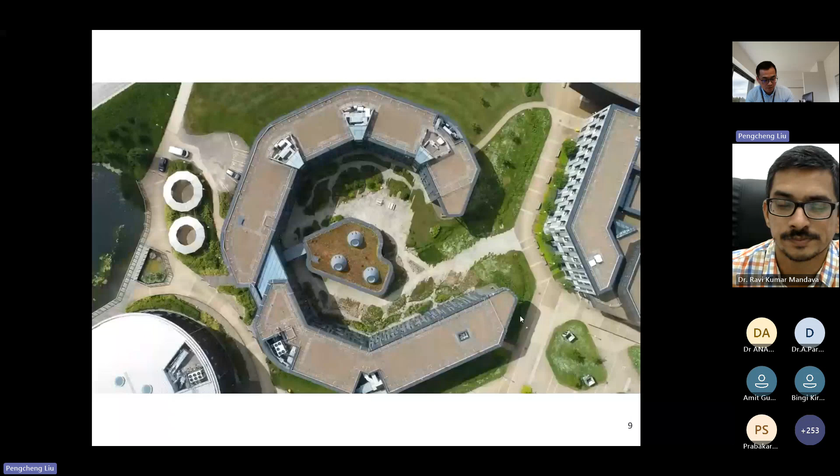Here's a video describing the department. The building itself is shaped like the capital letter C, representing the word 'computer.' Half of the building is used for staff offices, research labs, and meeting rooms, and the other half is used for software and hardware labs for teaching and research. As part of the larger computer science hub on campus, the Ian Wand building represents a commitment to fostering innovation, collaboration, and academic excellence.

York is home to 9 world-leading research groups within the department, each tackling critical challenges in various domains, including AI, automated software engineering, cybersecurity, human-computer interaction, vision, graphics, learning, and real-time and distributed systems.

Today, I'm a keen member of the Real-Time and Distributed Systems group, which leads the charge in advanced robotic and autonomous systems. Let's take a closer look at what we do. Our research group, established in 1990, focuses on systems where timeliness, coordination, and distributed computing are crucial.

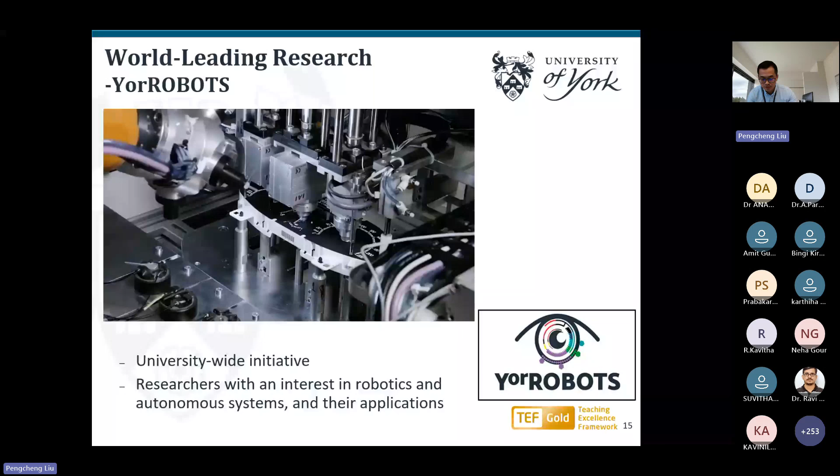The York Robotics Research Centre unites researchers from diverse disciplines with a shared interest in robotics and autonomous systems. This collaboration fosters innovation across areas like medical robotics, swarm intelligence, and ethical AI. By leveraging this interdisciplinary approach, we're addressing both the technical and societal aspects of robotics and autonomous systems issues.

At the University of York, robotics and AI research spans a remarkable breadth, engaging experts from at least 11 diverse disciplines across 11 departments. This cross-departmental collaboration enhances our ability to tackle complex challenges from multiple perspectives, for example from chemistry, computer science, electronics, mathematics, psychology, and more.

Our research focuses on designing systems that are advanced, meaning we employ state-of-the-art methodologies to push technological boundaries, and also ethical and trusted, meaning we're developing AI and robotic systems that are socially responsible and gain trust from users. These systems should also be safe and reliable.

We ensure the systems operate effectively, even in some unpredictable scenarios. So those are the principles which guide our efforts to create mobile and autonomous robots that are not only intelligent, but also dependable and ready for real-world deployment.

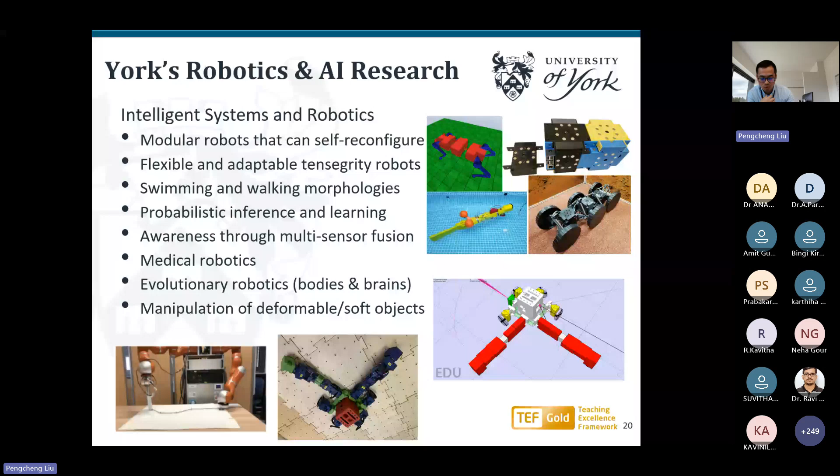Our research also addresses some of the most pressing challenges in robotics and AI today. For example, resilient systems in swarm robotics to ensure coordinated behavior among robotic swarms in unpredictable environments, and human adaptive learning to develop robots that can learn from human interactions and adapt in real time. I will come back to this area later in the later slides.

The other aspect is timing optimization in manufacturing, to improve efficiency in smart factories by ensuring tasks are completed on time and resources are utilized more efficiently. And the other is timeliness in wireless networks, where we're designing reliable and time-sensitive communication systems for autonomous applications. Each of those areas has far-reaching implications from manufacturing and healthcare to transportation and beyond.

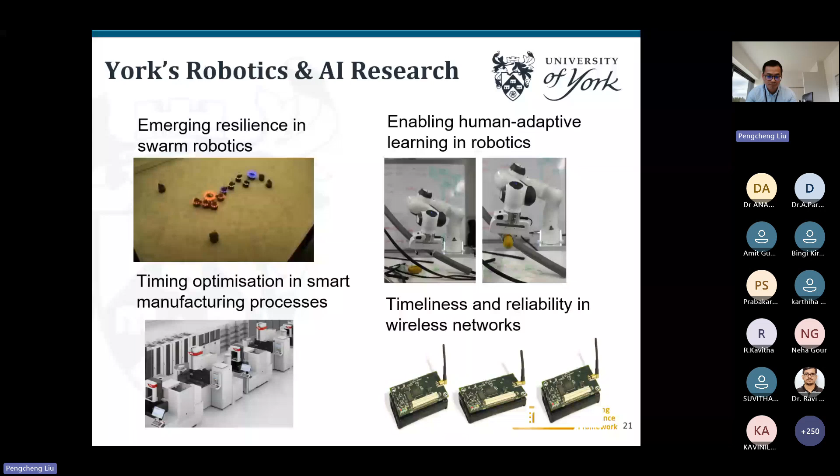We also play a pivotal role in the UKRI Trustworthy Autonomous Systems Program, which is a 33 million pound initiative aimed at creating autonomous systems that are both trustworthy in principle and trusted in practice.

At the University of York, the Institute for Safe Autonomy, or ISA, is a flagship initiative addressing the global challenges in ensuring safety for autonomous systems and robots. We have more than 35 million pounds invested. ISA is a hub of interdisciplinary collaboration, combining expertise across academia, industry, government, and civil society. Its mission is simple but critical: to design, develop, and rigorously test robots and autonomous systems to ensure their safety, and to set new standards for the development and deployment of robotics and AI.

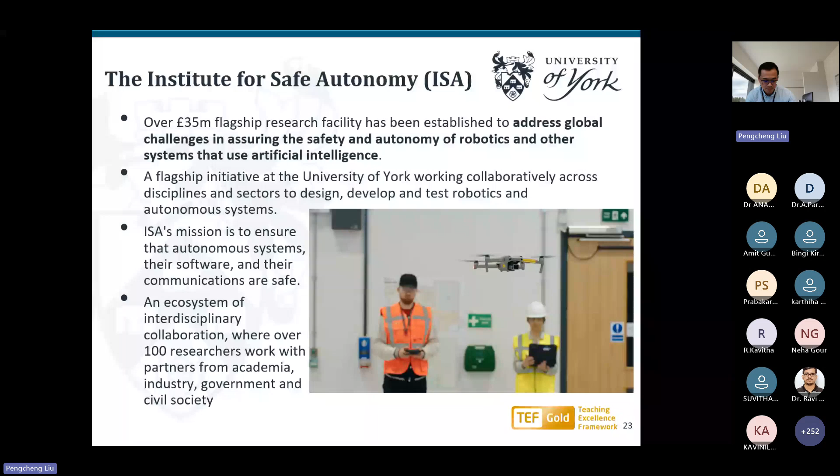I'm a key member of the ISA. Over 100 researchers work together there to shape the future of robotics and autonomy, from safe software to reliable communication systems.

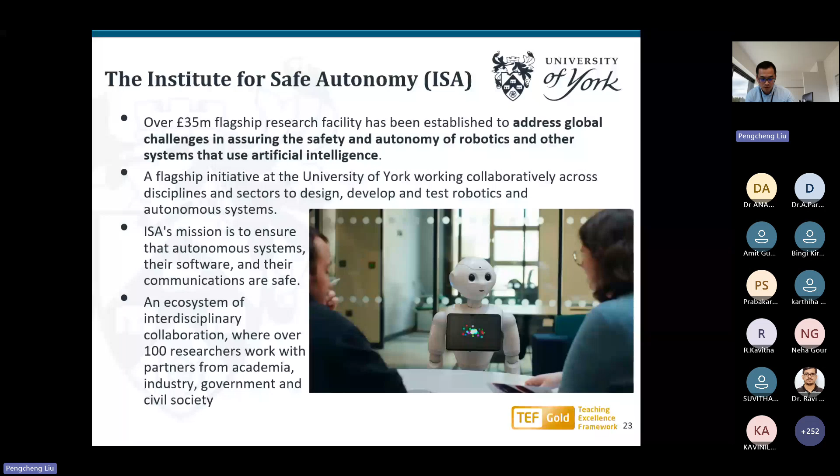The ISA's work is organized into 4 fundamental research pillars. The first is design verification: developing rigorous frameworks to test and validate the safety of both software and hardware for autonomous systems. The second is assurance, tackling the challenges of regulatory compliance and public trust to make autonomous systems more acceptable and desirable. The third is communications, innovating resilient communication mechanisms, including quantum communication technology, which is vital for secure and reliable operations. The last is society and ethics, applying practical ethics to ensure these technologies align with societal needs and values.

We have the most advanced facilities in the north of England, representing a state-of-the-art living lab for research, testing, deployment, and development of autonomous systems. For example, we have a 6-meter high indoor test space for evaluating ground vehicles, water drones, and aerial autonomous systems such as drones.

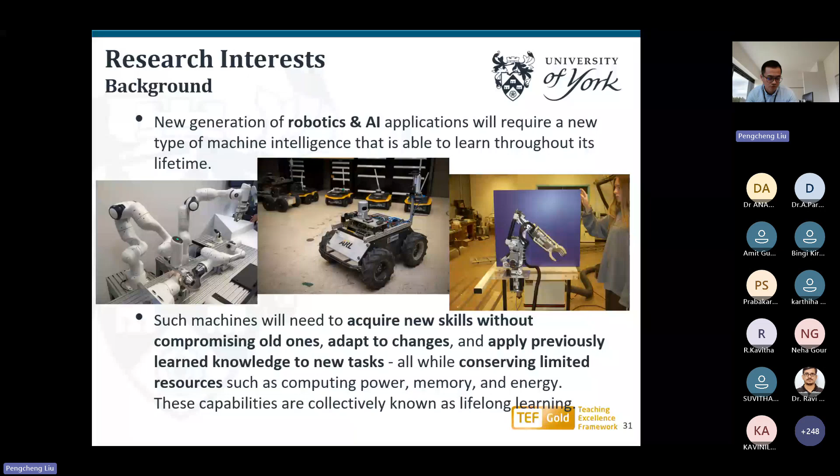Our vision lies in bridging the gap between biology and robotics to create intelligent systems with lifelong learning capabilities. By understanding the adaptability and autonomy found in biological systems, we aim to develop robots that are resilient, energy efficient, and flexible and adaptive in their interactions with humans and their surrounding environments.

This research vision has applications in areas such as human-robot collaboration, which I will talk about later, and soft robotics, agriculture and aquaculture, environment monitoring and environment control, and embodied artificial intelligence. These innovations are shaping the next generation of robotics AI systems.

To generally summarize our research vision, we aim to develop intelligent machines that behave like biological agents. These machines will never stop learning, continuously improve their performance with experience and interaction with the environment, and operate with minimal resource demand. Our goal is to create systems that adapt dynamically to new environments and challenges, enhancing their utility across industries. So lifelong learning is not just a concept, it's a foundation for the next wave of robotics innovation.

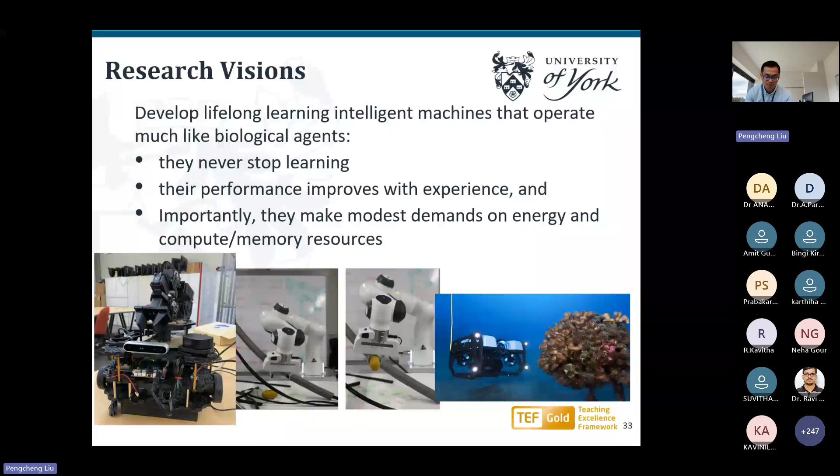I'm looking forward to establishing some new partnerships with your institutions, and hope to create more innovative solutions in robotic AI.

So those are the photos we took. We built up a foundation, and with this foundation we're driving advancement in autonomous systems, robots, and lifelong learning across the globe.

Now I've shifted my focus to the technical detail of motion and path planning, a key area of research in robotics. Let's take a moment to bridge the gap between theory and application in robots. We've dived deeper into the specifics of motion planning methodologies, and how those theories are being applied to solve real-world challenges.

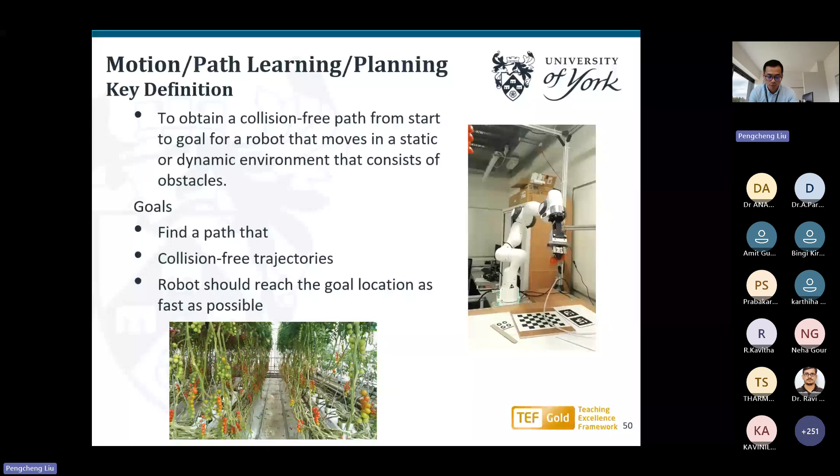So the problem of motion planning can be stated as a start pose of the robot, a desired goal pose, and we need to know the geometric description of the robot, which means the robot must know or have an indication of where it is in the map. And also we need to know the geometric description of the world, which means a global map is needed.

So to further understand motion planning, let's define a few key concepts. The first one is configuration space. This refers to the set of all possible robot configurations, where each configuration specifies the position and orientation of the robot in the environment. For example, in 2D space, a configuration might involve just x and y coordinates, while in 3D space we also consider orientation angles. Using the configuration space simplifies the planning process by mapping the robot's physical environment into a mathematical space.

In the C-space, we also represent the obstacles in the robot's configuration space. Each obstacle maps to a region where the robot's configuration would lead to a collision. For example, in 2D space, an obstacle might be just a physical rectangle, but in 3D configuration space, it becomes a larger area, accounting for the robot's size and shape.

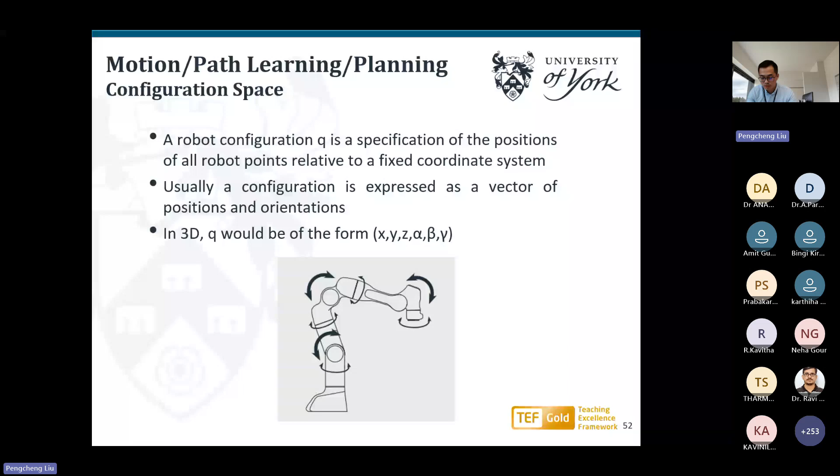The next definition is the obstacle region. The obstacle region in motion planning refers to the part of the robot's environment where movement is restricted due to the presence of obstacles. Those obstacles could be static, like walls, furniture, or equipment, or dynamic, for example moving vehicles, humans, or other robots.

For environments with moving obstacles, the obstacle region is time dependent. So the algorithm must predict and account for their motion, which adds more complexity. The obstacle region is critical in path and motion planning algorithms because the robot's trajectory must avoid this region while navigating from the start to the goal.

The prevailing algorithms, like sampling-based planners, which I will come back to later in the slides, for example RRT, or optimization-based methods, explicitly account for the obstacle region to ensure safety and efficiency. By accurately modeling the obstacle region, motion planners can generate collision-free trajectories and adapt to complexity in the cluttered environment.

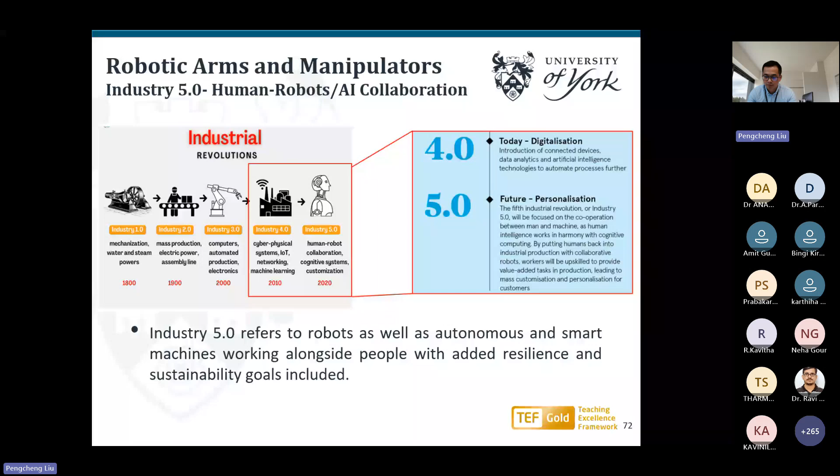So industrial robots in sectors like automotive manufacturing operate in a high throughput environment. Here's some pictures. The traditional robots, as I mentioned, operated in isolated cages, performing tasks like welding and assembly at high speed. However, those systems required extensive programming, leading to significant downtime during reconfiguration.

So the trend is with collaborative robotics, we are moving towards greater flexibility, allowing robots to operate closer to human operators, while simplifying reprogramming through learning by demonstration, for example. I will come back to that point later.

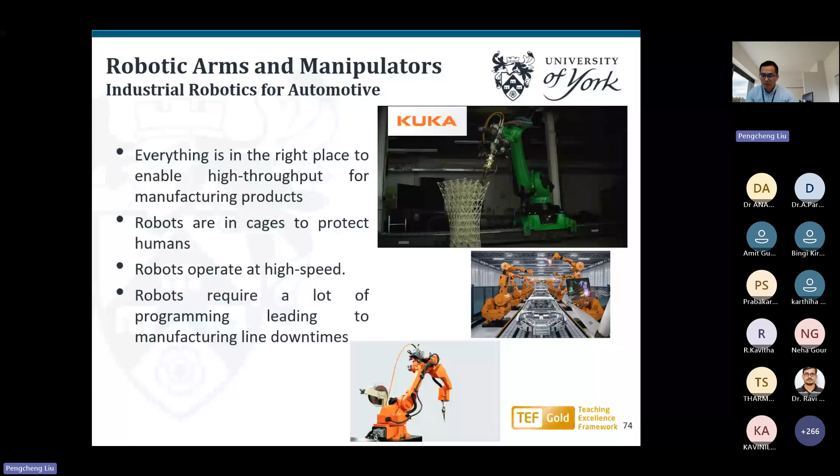So those are designing options, solutions for the robotic arm, which involves several key components. The first one is identifying the objects to manipulate and their positions, and then configuring the end effector and low-level controllers for precise handling, and then implementing trajectory planning and intelligent control architectures to achieve the desired motion. Sensors and virtual simulation environments are often integrated to ensure robust design before deployment in the real world.

As you all know, safety is paramount in robotic systems, especially when working alongside human operators. There are some standards, such as ISO TS 15066, 2016, which outlines safety requirements for collaborative robots, ensuring human-robot interaction remains safe. Here are some links and some readings.

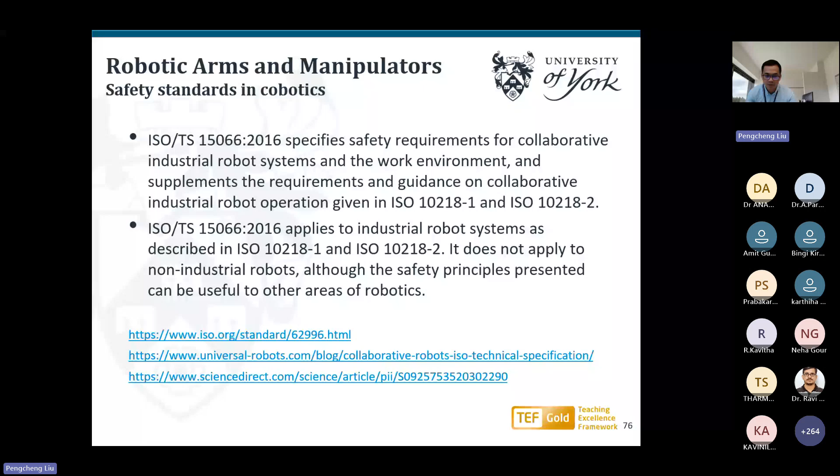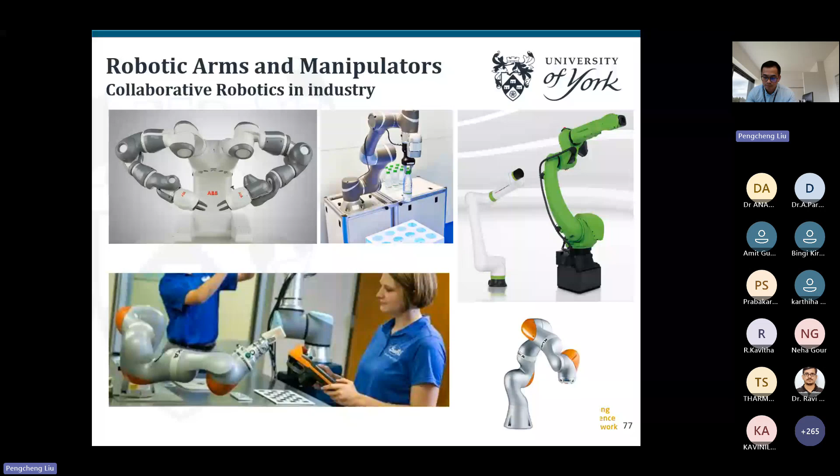So those are some prevailing and popular collaborative robotics in industry. The cobots are versatile and user-friendly, designed to work without physical barriers. They operate at a lower speed, can be repositioned easily, and are often programmed via kinesthetic teaching, enabling rapid deployment for new tasks. I will come back to that later - it's how we can collaborate with the robot and how we interact with the robot.

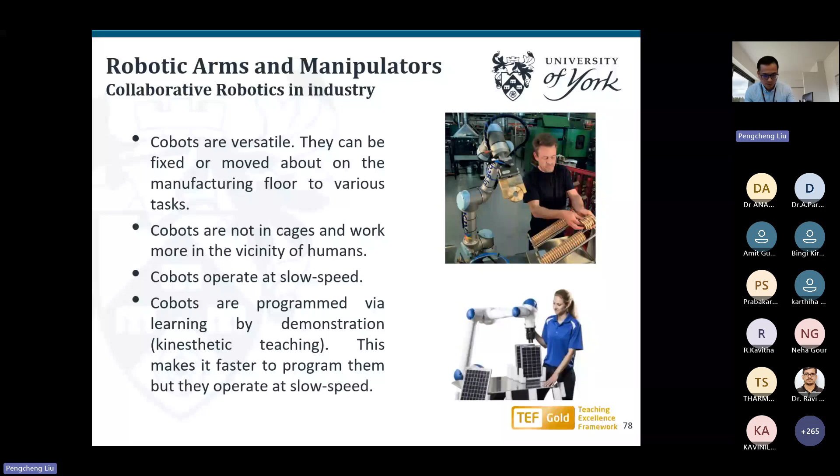So the robotic arms and manipulators are mechanical systems designed to replicate human arm movement and perform tasks like lifting, assembling, or welding. But they vary in design, functionality, and number of degrees of freedom, which defines their range of motion.

Here are some different types of robotic arms, like articulated arms, which is the most common design, resembling a human arm with multiple rotary joints, which has high flexibility, making them ideal for complex tasks like welding or assembly. And the other one is Selective Compliance Assembly Robot Arm, which is designed for tasks requiring high precision in a 2D plane, such as pick and place operations, and is compact and fast.

And some other arms like Cartesian robots, which operate on 3 linear axes, X, Y, Z, moving in straight lines, ideal for tasks like 3D printing and CNC machining as well. And other arms like cylindrical robots combine rotary and linear motions, working with cylindrical workspace, used in some simple tasks like handling machine tools.

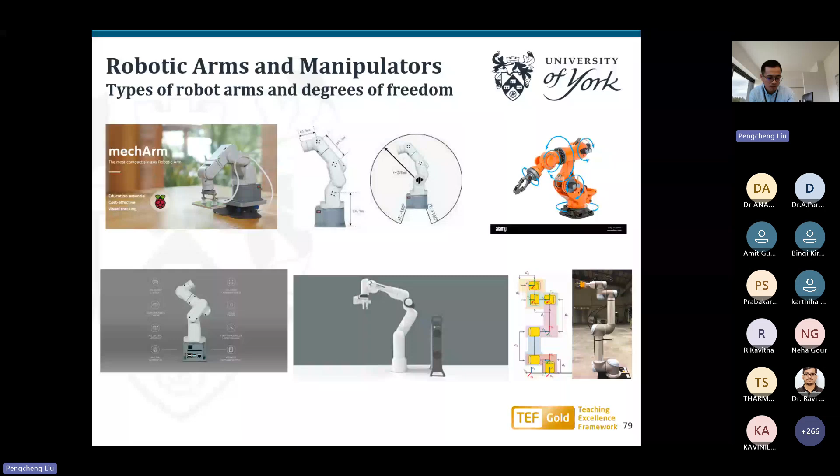So the robot I'm going to talk about later in the slide is a Franka Panda robot, which is 7 degrees of freedom, which has 1 degree of freedom redundancy.

And here's another very popular robotic arm, which is a universal robotic arm produced by a Denmark company, which are lightweight, flexible, and collaborative, designed for a wide range of industrial applications. And so it's a cobot, collaborative design.

And also it is very easy to program. It has an intuitive programming interface and flexibility, combining different models in varying payload like UR3, UR5, UR10, and can be used for tasks like assembly, packaging, welding, and more. And 6 degrees of freedom - it has 6 joints, offering high flexibility and a wide range of motion.

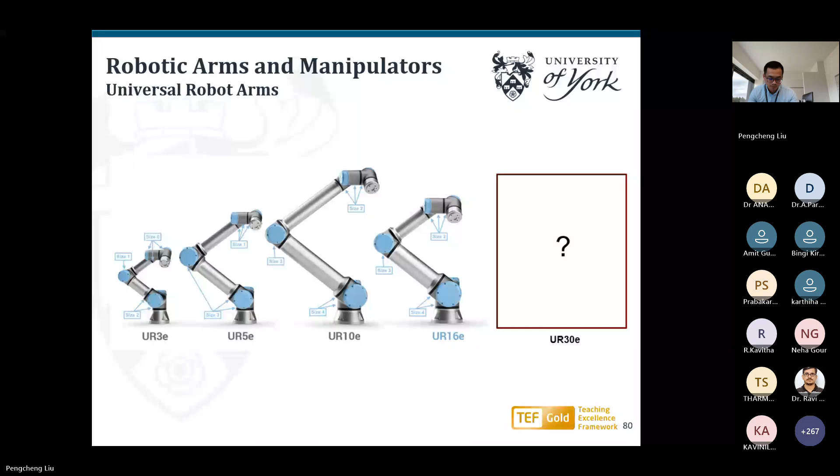So next, I'm going to talk about the end effector types. The end effectors are very critical for robotic arms as they determine how robots interact with their environment.

So the common types include parallel grippers, which are simple and widely used for pick and place tasks. And the other one is three-finger grippers, as you can see in the second figure, which provide dexterity for handling irregular objects. And also vacuum cups, which are ideal for smooth surfaces like glass or metal, and magnetic grippers, which are effective for handling ferrous materials.

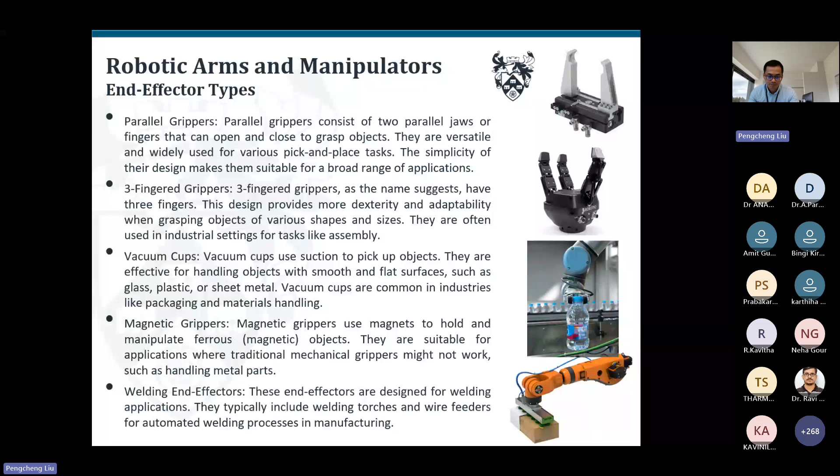So more advanced end effectors, like I mentioned, such as soft grippers and gecko-inspired grippers, for example, which enable robots to manipulate delicate and unconventional objects safely. Part of our work is also involved in soft robotics design and control systems, but I'm not going to cover that in this presentation. Perhaps in the future we can have more discussion and exchange of ideas in that direction.

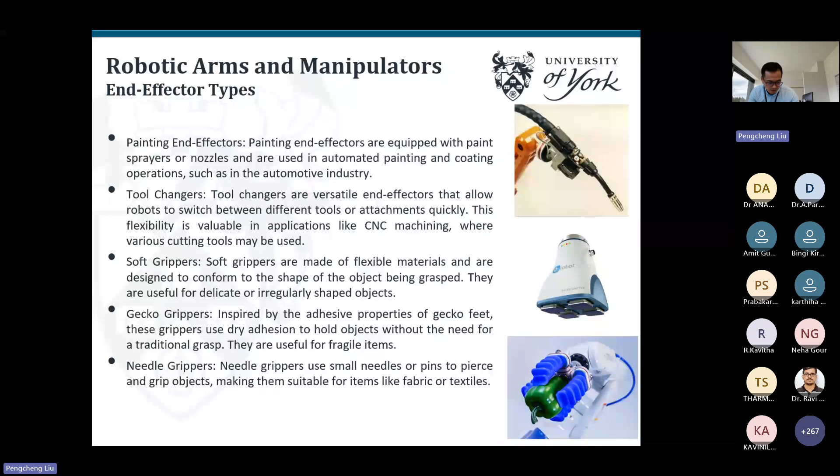So, robot kinematics. I understand there was another talk covered by another lecturer specifically on kinematics, so I will not go into details in this part, just quickly skip it. As you all know, kinematics is the foundation of robotic motion, enabling us to determine the position and orientation of the robot's end effector based on the joint angles.

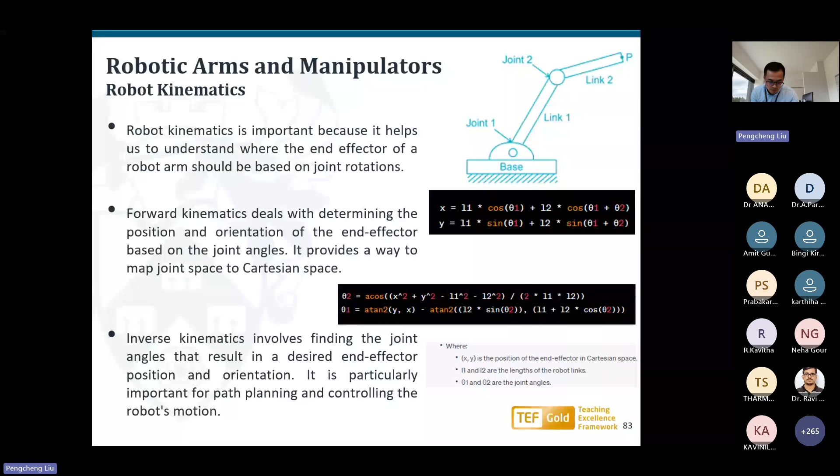So we usually need to handle forward kinematics, which calculates the position of the end effector based on the joint rotations, and inverse kinematics, which determines the required joint angles to achieve a desired end effector position. Both of these are critical for trajectory planning, which ensures the robot moves precisely and efficiently to complete the task. So here is an example of robotic kinematics for the universal robot.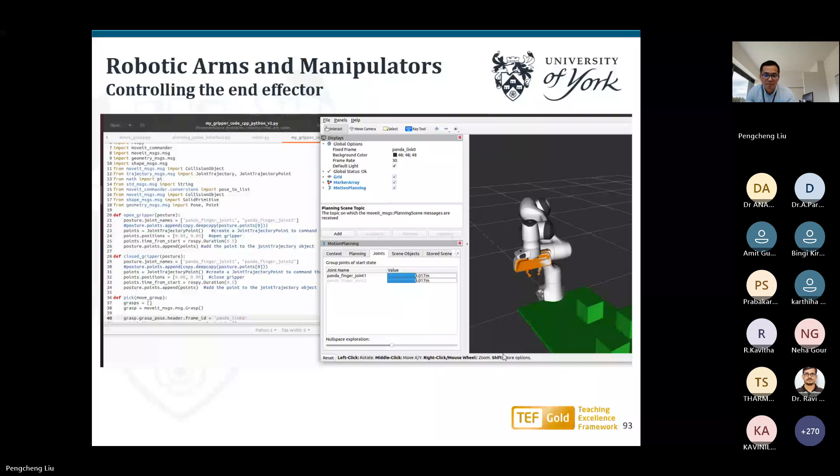Robot arm poses. So we define grasp poses and approach poses as well. In terms of how we design the robotic arm solutions, we consider positions, end effectors, low-level controllers, as I mentioned, incorporating sensors and control architectures. We use simulators like Gazebo and CoppeliaSim to respect the physics, providing realistic scenarios for testing.

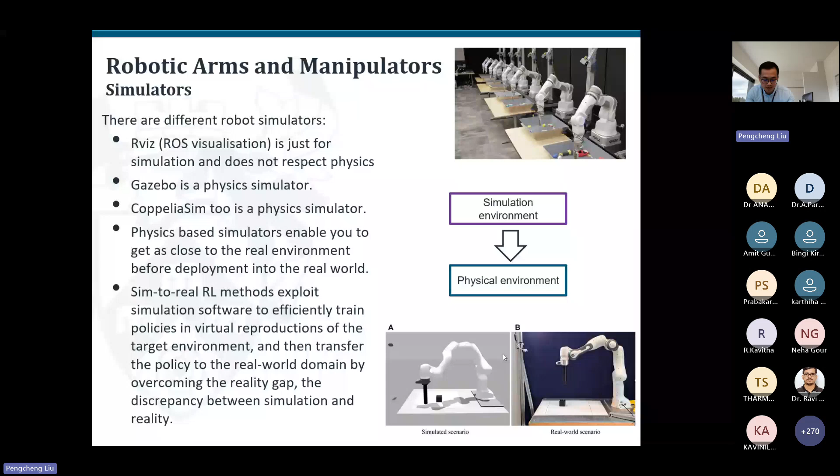So now, here are some key recent advancements and readings. Motion planning in robotics becomes much more complex when robots must operate in dynamic, cluttered, and uncertain environments. To address these challenges, we've developed a long-term cognitive motion learning architecture, which focuses on continuous learning, multimodal sensing, and adaptive learning. I'll give you some bit of ideas on this.

So motion planning in complex environments could include dynamic constraints and human-robot collaboration, some large spaces with constraints beyond sight, and some narrow spaces such as corridors.

And so robots operating in dynamic environments face some challenges - for example, constantly changing obstacles in a dynamic environment, some uncertainties caused by sensor noise or incomplete information, and some cluttered spaces as well. So to navigate these scenarios, the robots require real-time perception, predictive modeling, and robust decision-making capabilities.

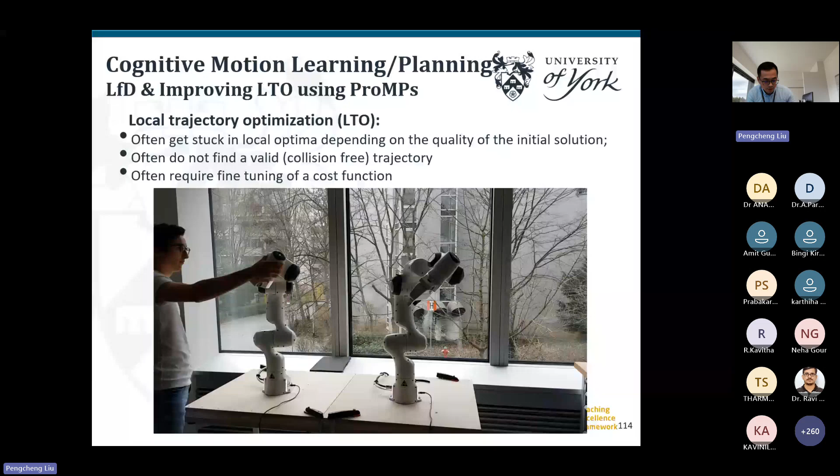So we came up with a novel approach to teach the robot various feasible ways of doing a task and let the robot learn autonomously from a human expert. In the process, all the data from the robot is collected for training, including velocity, position, and acceleration.

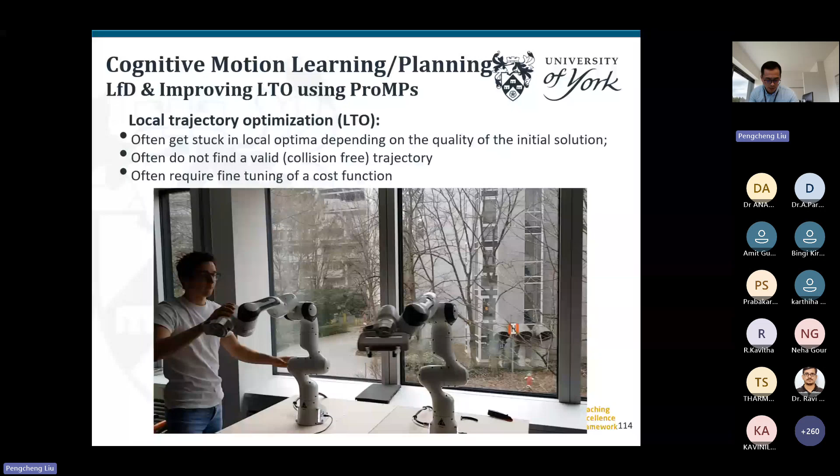So we propose a probabilistic movement primitive, which is a powerful framework for improving motion learning and motion planning. It models the trajectories as Gaussian distributions, capturing the variance and optimal behaviors demonstrated by the human during training. At every time step, we fit a Gaussian distribution over the state, and we use it to set a quadratic cost function, which captures a mean and covariance.

The result shows that our method generates trajectories that exactly reproduce the demonstrated distribution. We also introduce another parameter to capture the mean and variance of the weight vector, and we applied conditioning by adding a desired observation to the probabilistic model, so the end effector can also adapt to new goals in task space.

So for trajectory optimization, we define the trajectory smoothness cost and an obstacle avoidance cost, as mentioned earlier, and we calculate the gradient. This allows us to conduct collision-free and smooth trajectory optimization.

So generally speaking, we generate motion trajectories using priors from human-demonstrated trajectories, which is the training data, and those trajectories are adapted to the new desired end effector configurations as well. We sample the weight vector from the learned distribution and conduct motion trajectory optimization.

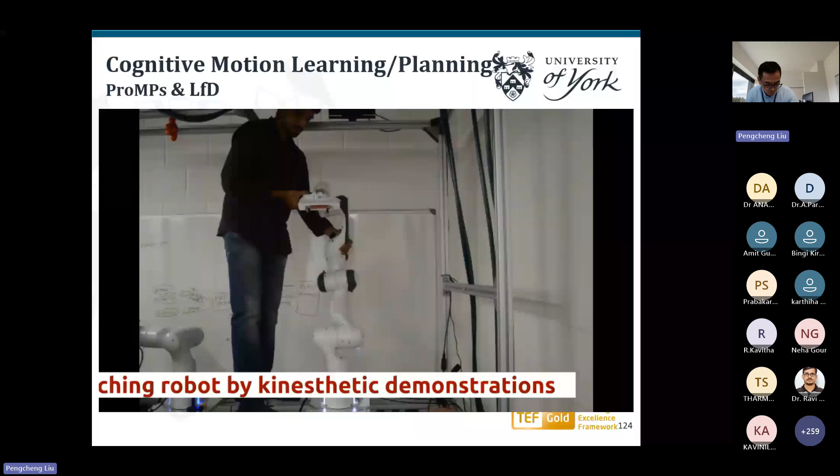So by leveraging priors and learning from human expert demonstration, we enable the robot to learn from the demonstration and generalize its behavior to new scenarios, as you can see later in the video, such as grasping objects in cluttered spaces.

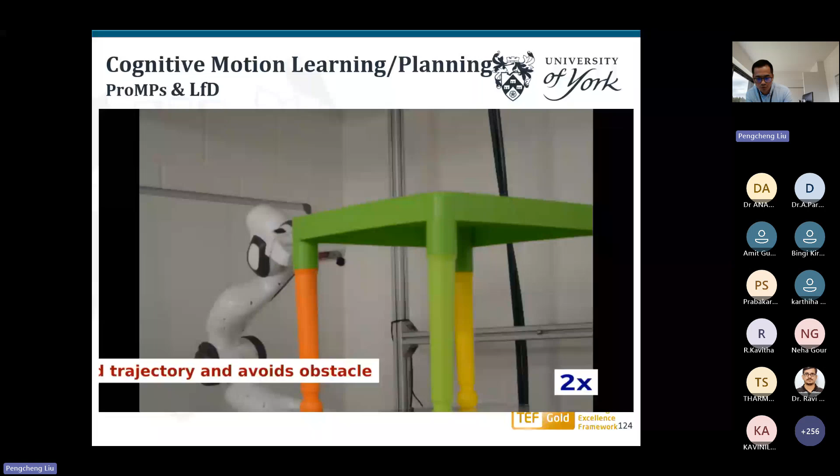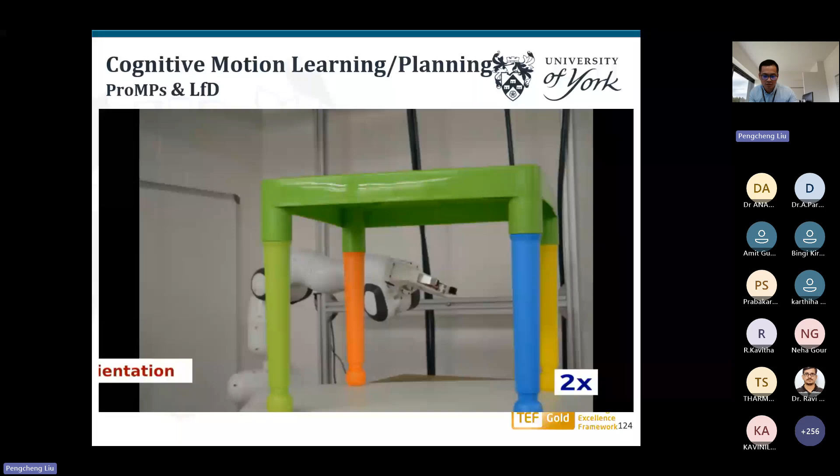So we teach the robot, we demonstrate how the feasible trajectory can be, and then the robot will learn a new trajectory and generate and execute it. And when the environment changes, for example the table orientation changes, it is still able to adjust and adapt to the new orientation and the changing environment.

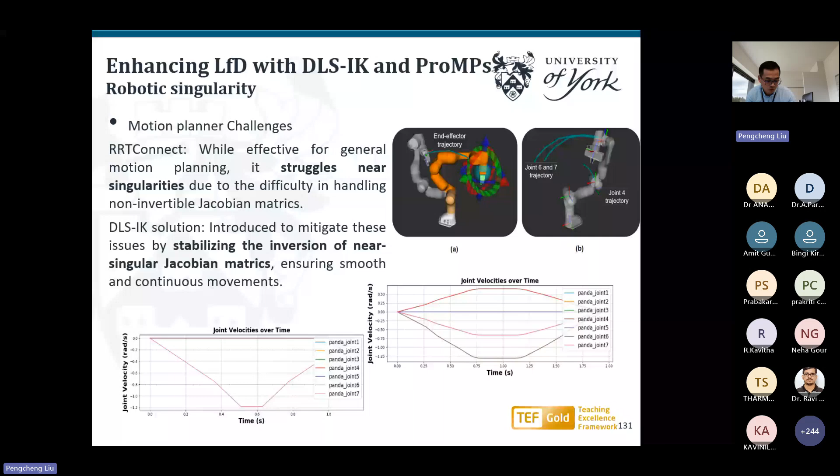We introduced a damping factor in the motion planning framework, which helps stabilize the inversion near a singularity or ill-conditioned Jacobian matrix, controlling the trade-off between stability and accuracy.

We integrated this with learning from human expert demonstration as well, using probabilistic movement primitives for recording demonstrations, encoding them, and reproducing the demonstrations. Our solution involves damped least squares and these movement primitives, which stabilize the inversion of near-singular matrices and handle singularity problems. This means we introduce a damping factor that controls the trade-off between stability and accuracy, and a pseudo-inverse Jacobian that provides a least squares solution to manage underdetermined or overdetermined systems. Learning from human expert demonstrations will make the robot adapt to its limitations and workspace constraints.

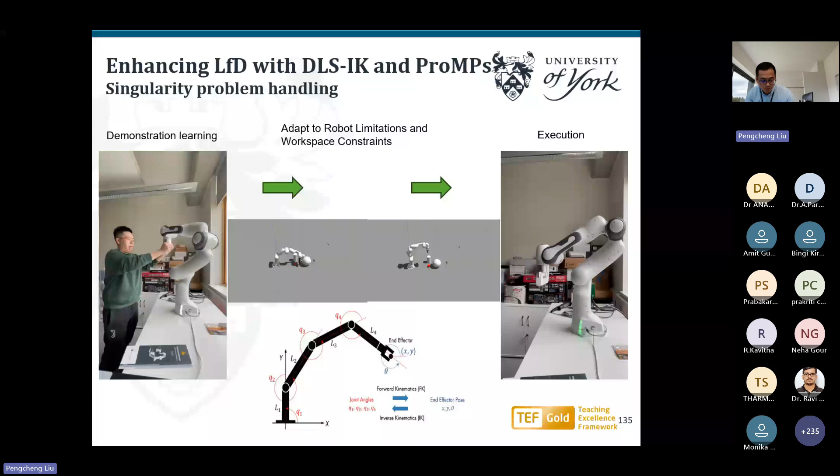Here is the overall overview of the framework. Our results show that DLSIK, the method we propose, greatly improves robotic arm performance by maintaining stable joint positions and reducing abrupt velocity changes for smoother motion, and also contributes to managing torque more efficiently to prevent hardware damage.

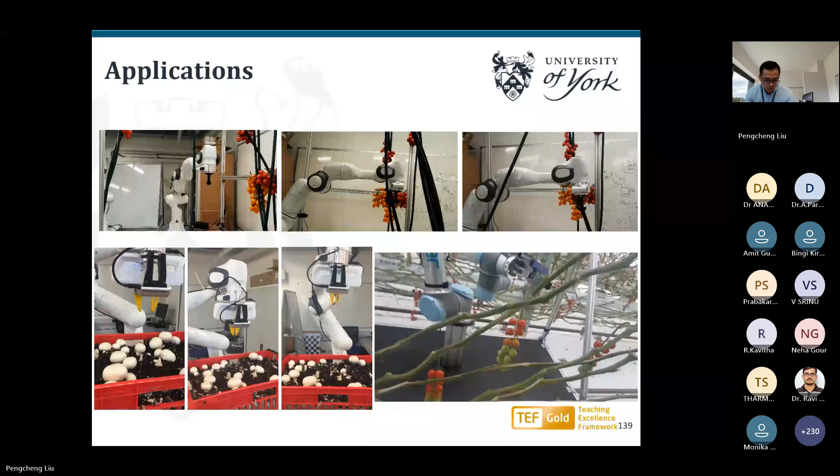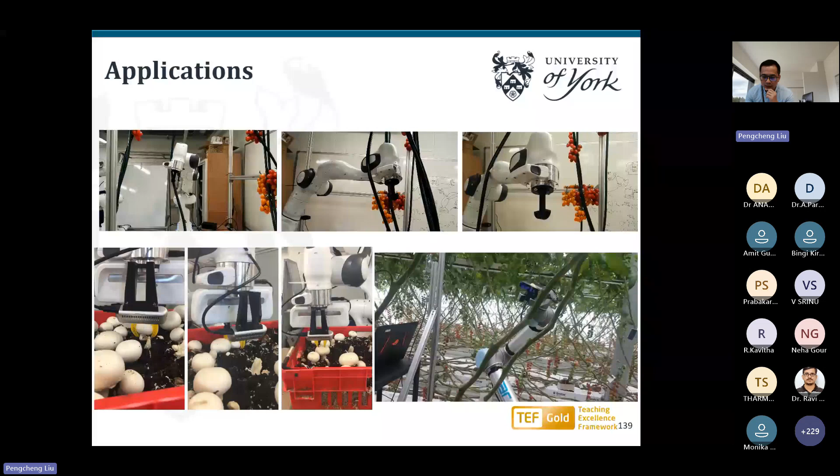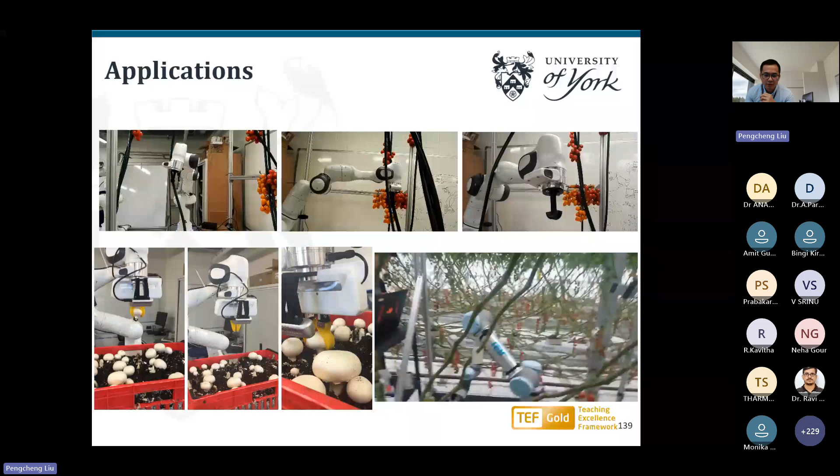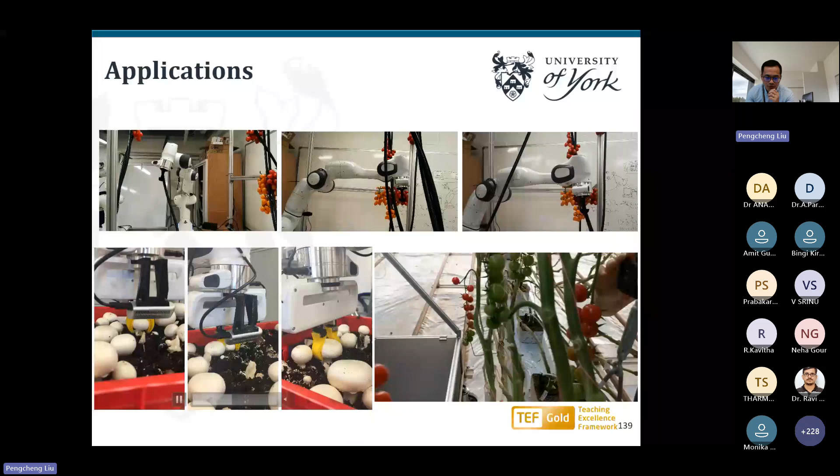Here are some applications we have, including human-robot collaboration, which enhances safety and adaptability in shared workspaces, and applications in agricultural environments for perception, motion planning, and cutting or harvesting work. We generally use different kinds of vision sensors, as you can see, including a hand-eye system with an Intel RealSense sensor, and a fixed sensor as well, a Kinect fixed on the frame.

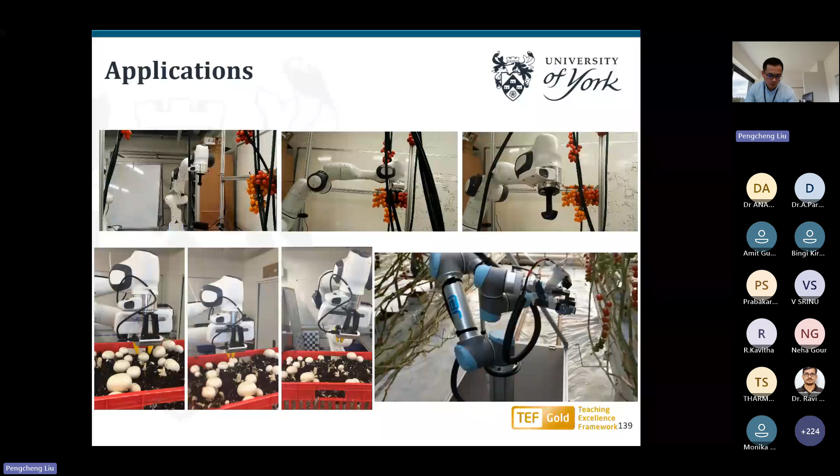I'm aware of time, so I will quickly go through the future trends in robotics AI. This area is evolving rapidly, driven by emerging trends and technologies. They are not just about making robots smarter, but also making them more adaptable, ethical, and impactful. I will explore some of the key areas shaping the future in this area, in my opinion.

I see some opportunities for collaboration and exploration, so the hot topics in this area. Some of the hot topics include AI in safety-critical systems, meaning incorporating AI into systems like autonomous vehicles and healthcare, where safety and reliability are paramount, and digital twins, virtual replicas of physical systems for real-time monitoring, predictive maintenance, and optimization.

Also automation and decision making, so algorithms that improve resource allocation, task scheduling, and system performance. Other hot topics include IoT integration, real-time control and monitoring of IoT devices in domains such as agriculture, aquaculture, and manufacturing, and predictive maintenance, using AI to forecast system failures and optimize maintenance schedules.

The future of robotics AI research will be defined by advancement in key areas, for example sustainable computing, which means designing energy-efficient systems and integrating renewable energy resources, and ubiquitous real-time computing, reducing latencies in computing and communication networks to enable seamless edge computing. Also collaborative autonomous systems, robots working collaboratively in distributed networks, sharing data and decisions in real time, and AI-driven distributed systems, where systems can self-optimize and adapt dynamically to environment changes.